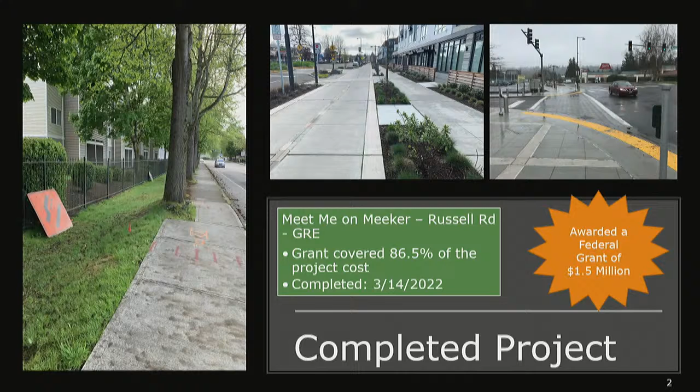So as you can see, we improved that area between those two areas there. We got a grant for $1.5 million for that. And that covered about 86.5% of that total project. And we just got the lights put in early this year to complete that project. Another big project we did last year was 212th Street between 72nd and 84th. And the grant covered about 86.5% of that as well. And that was a $2.1 million grant. So grants pay for a lot of work around here.

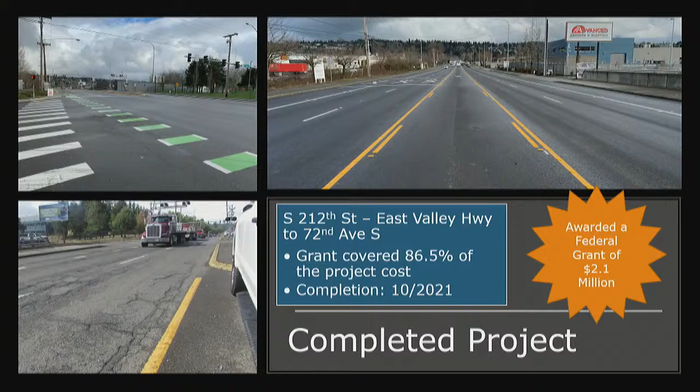So another opportunity we had was Lake Fenwick Road, a chip seal project. This is about 1/3 the cost of an overlay, and we were able to double chip this. We put a lot of oil down, gravel it, then oil it again and gravel it again, and that creates a surface that extends the life of the pavement at least another 7 years. So total project cost on that was $160,000. So compared to the 212th Street, you can see the big difference in that.

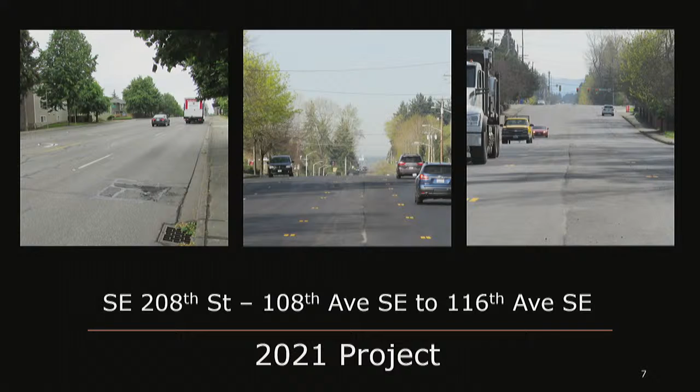84th Avenue South, we did some patchwork there. We didn't have quite enough money to do a full overlay in there. We're still waiting for additional funding for that, so we've completed a lot of patchworks in there. I know our crews spent a lot of time filling potholes in there, so this was a real blessing over this last winter for us. 208th Street, didn't quite have enough time last year to do it, but as you know now, it's been already paved up there, and that's complete. Outside of some lines, I think, is what's left up there.

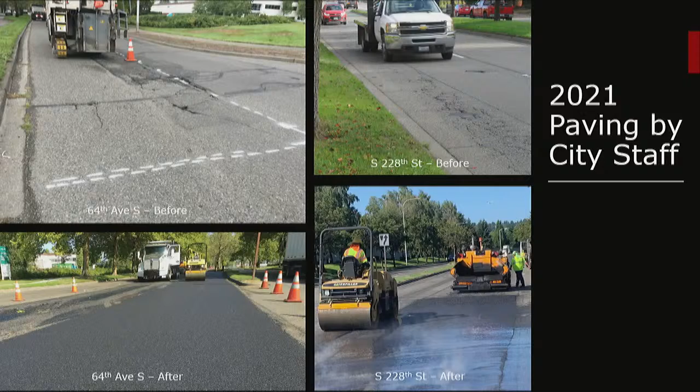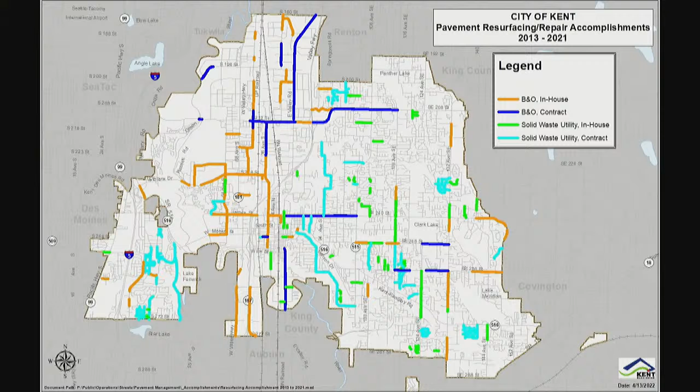So, some of our paving by city staff, I'm going to run through these real quick. We did some on 64th Avenue, 228th Street, 72nd Avenue, 124th was a big one for us up there. As you can see, this is a map from 2013 to 2021 of all the work that we've done. It's been broken out by funding source as well as in-house and contract work. So if you get a chance to look at this later, please do so. Our big project this coming year is going to be South 212th Street.

It's going to be from the Green River to the West City limits there, or Orillia Road. The total length is about a mile. The estimated cost is about $3 million. We've got $1.5 million in a grant for that, so it's covering literally half of that project. It'll be paid for by grants.

This is our 2022 work plan. You can see that we've shotgunned it between the in-house and contract. It's mainly on the East Hill. It's got a lot of work up there. We got some valley work and a couple of spots on the West Hill as well.

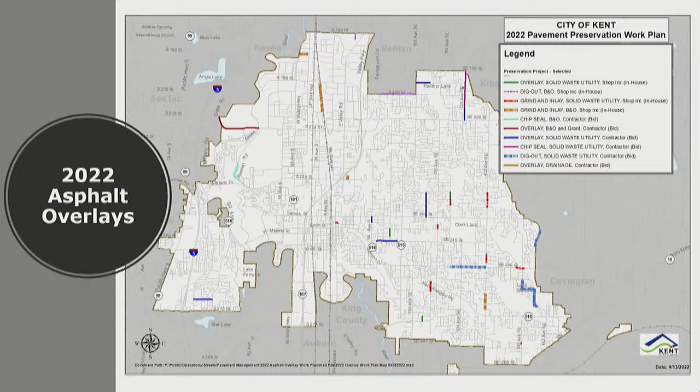So some of the work we're going to do in-house is on 200th Street. That's just west of the Benson there, 108th. And we're going to do some dig-out patching, and hopefully next year we'll get a chip seal on this road as well to complete the project.

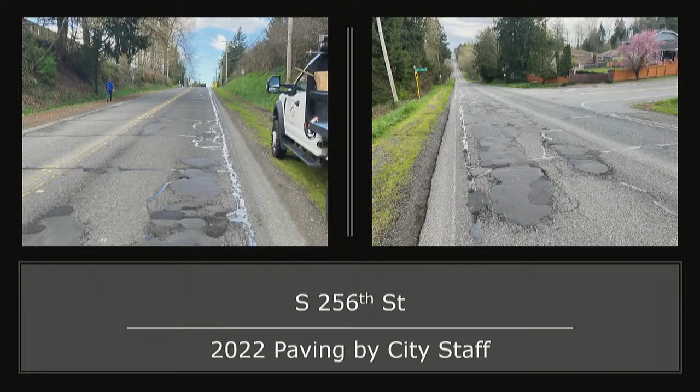256th Street, as a few of you know, this is a pretty rough ride. It took quite a beating this past winter. This year we're going to be grinding out that lane and repaving it so it'll be smooth again. And hopefully we won't get any more potholes further on from that.

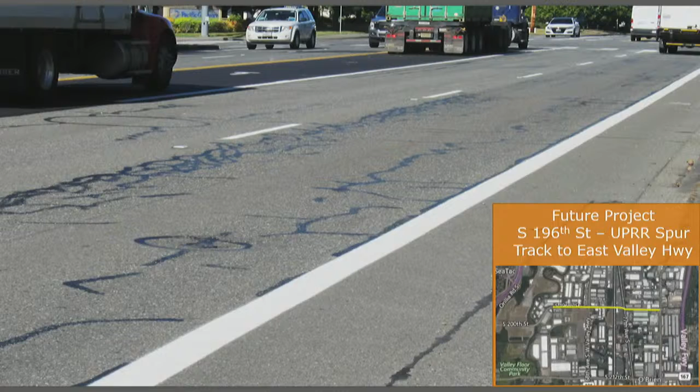So some of the future projects we have are some overlays on 196. That's from the UP Spur Track on the west all the way to East Valley Highway, leaving out the bridge, of course. That's all concrete there.

277th is on our list as well. This road is approaching almost 20 years now. And right now it's a good candidate for a chip seal. So again, we're looking at cost-reducing ways to gain life out of our roadways.

This is Central Avenue. Others call it 84th Avenue. It's between 167 and James Street. Looking for that to be added soon.

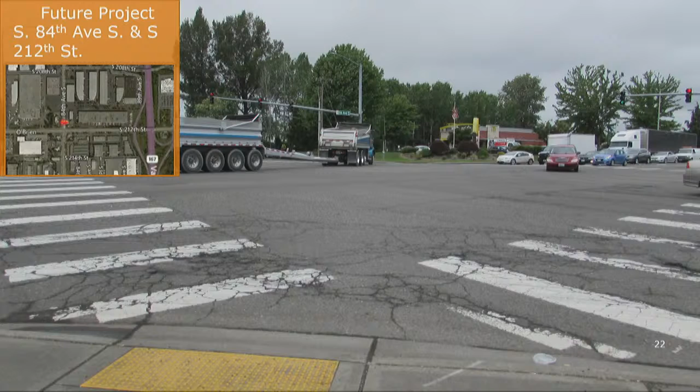212th and 84th Avenue. This is one of the largest intersections we have in the city. It's in pretty bad shape. We're going to try to include this with our overlay on 84th from 196 through this intersection. But right now we're just waiting on funds to be identified for this project. In the meantime, we'll probably be doing some patchwork in the crosswalk areas where there's pedestrian access.

So let's get to the classifications of roads. Principal arterial streets have life cycles of approximately 12 to 15 years. In some cases they go a little longer. You can see here 212th Street and Pac Highway. Those are both considered principal arterials.

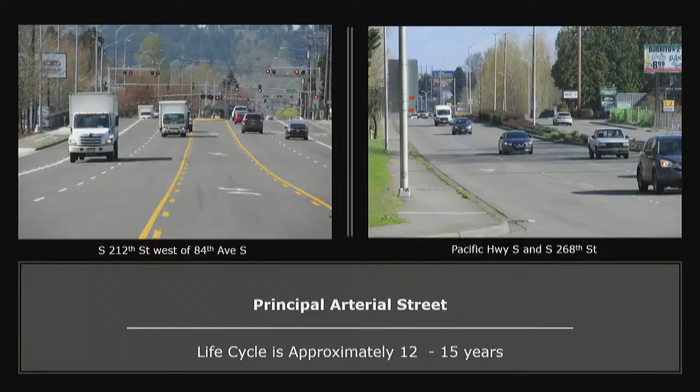Minor arterial streets, the approximate life cycle of those is 15 years in length. Again, some of them go a little longer than they should. You can see the streets: 132nd, Military Road, Reith Road, and West Meeker Street.

Residential collectors go for about 15 to 20 years of a lifespan, and those are roads like 124th, you can see here at 264th, and also up above there at 202nd and 124th. And then we have residential streets. Life cycle is minimum, in my case, 25 years. Some of them we've overlaid and they've been in there for like 40 years. So it just depends on the amount of traffic that's on them. You can see we have one here in Randall Park on the West Hill and a newly paved one up there in Seven Oaks area.

So pavement condition index, that's how we rate our roads. That's most commonly known as a PCI. And that's a rating that goes from 0, which is like unconfined gravel, to 100%, which is newly overlaid. This is on 64th Avenue, and this is what we would call excellent, in the excellent category, because it's newly paved, all the markings are intact, and it's not even discolored.

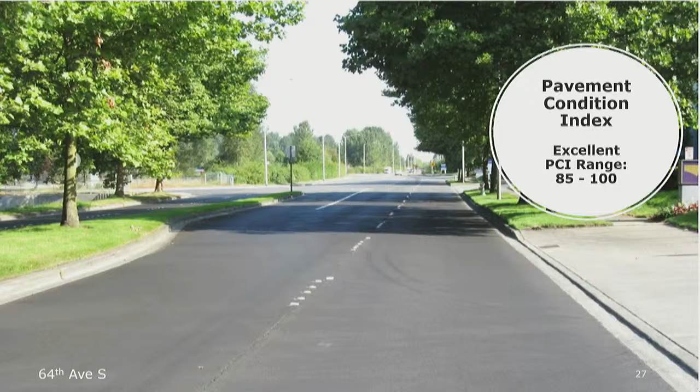So the next one is the same road, 64th Avenue, but down towards the school and the postal distribution plant. So that's the next range. 70 to 84 is good. And here you can tell we're starting to get a crack in here. That's ready for a crack sealing job, but the lines are all intact, the legends are all intact. It's in fairly good shape.

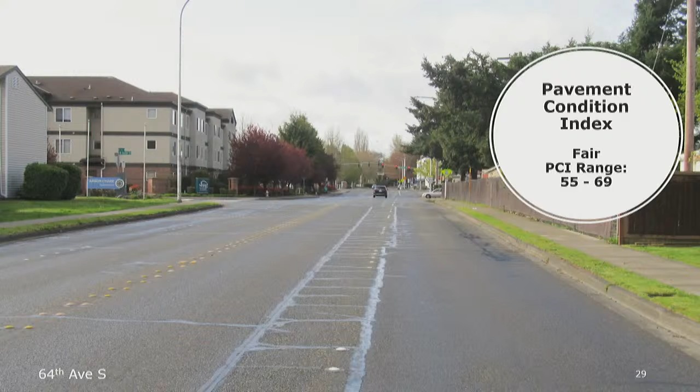And this is 64th again, at West Smith. Now this one we're getting into more cracks. You can start seeing utility cuts coming through the overlay. You can see transverse cracks, which go side to side of the road, and we got a little bit of alligator cracking on the side. This is a fair range, 55 to 69. All three of those areas, these roads are in fairly decent shape to drive on. Yeah, they need some work. We may have a pothole or two here and there.

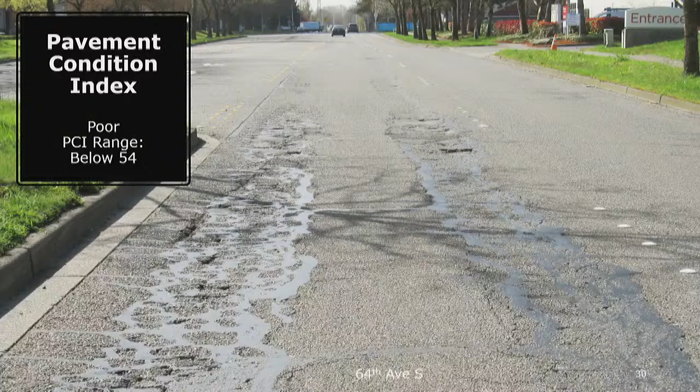This next one is the last one. This is on 64th as well, just south of 212th. This is considered below 54. I would even consider it probably in the 30s. This is where you'll actually have to go and dig out the whole area there and rehab that street, where it's beyond just an overlay.

So if you want to put a graph on all these numbers I just gave you, 28% of our roads are in poor shape. But remember when I said group those three together, we're about 72% of roads that are really in good shape to drive on. Basically, it's in the good, it's in the fair where we need to just start doing overlays and things like that. So really, that's kind of like 50-50, I would think, when you bucket that. Yes. Maybe. Yep, absolutely.

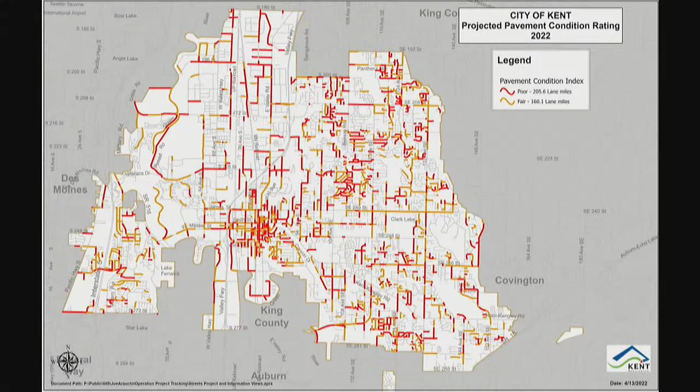So here on this map I showed you, we knocked off the good and the excellent just to show you the fair and the poor. The poor roads are all in red and the fair roads are in orange. And you can see that sooner or later those orange roads are going to start going into the red. Maybe not today, maybe not tomorrow, maybe not even next year, but soon enough. So that's why we rate our roads as often as we can so we can stay on top of that.

So potholes. Some of the causes are excessive moisture in the subbase or subgrade, and insufficient pavement thickness. Some of our roads are only 2 inches, and some of the annexed areas we have are less than 2 inches. So we fill a pothole, it's like that deep before you get gravel. Freeze thaw causes potholes, and constant traffic loading.

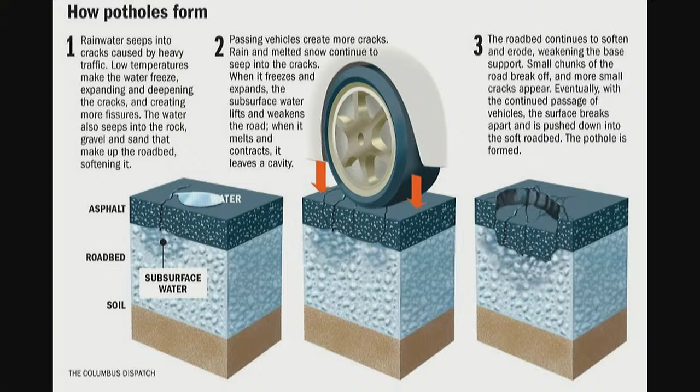So how do potholes form? I know most of you have seen this before, but it's really a good illustration. In a good to excellent road, the drainage runs off the road into the gutters down the system. When you start getting into the fair, you start getting cracks. Water finds those cracks as the easiest way through. They end up going into the subbase and start to soften it, and more traffic pounding creates more cracks, and eventually you're going to have a pothole. And if you have a pothole this big during a rainstorm, it can grow to 2 to 3 feet in a matter of a couple hours. So that's how drastic some of these can get.

So this is a little different map than the last map you all saw. The last one had lines and greens and yellows on it. This one here is when they go out and fill a pothole, they're able to mark it with our new system now and just mark that road exactly where they'll drop a pin. And that's what this map is. So yellow is one time, all the way up to a red or a dark orange that's up to 30 potholes. So you can pretty much see 132nd is where we got most of the problems, and 256th.

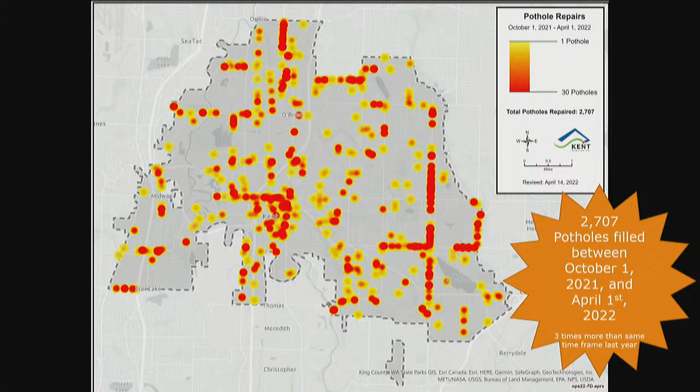So with that, we filled over 2,700 potholes from October 1st to April 1st of this year. And in comparison, from October 1st of 2020 to April 1st of 2021, we only filled 900. So you can see this is 3 times the amount of potholes that we got over the last year.

So, winter weather road damages. It's not only the freeze and thaw, it's water over the roadway. Now this is 148th, right down there by 256. It's constantly underwater because of the low elevation of the road and the high water table. So that is saturated base all the time. So we want to keep the vehicles off of that as long as possible, otherwise it starts destroying the road

as we go. Is 148, once you cross Soos Creek Bridge and then you make that left for 148, is that still Kent? Yes, down there. The whole road is Kent all the way, even the loop back to 240th. Oh, really? Okay. So we close that road quite frequently, right?

So here's the big one over here on 248. This road was in the lower end of the fair range, had some cracks, alligator cracking, and it was ready to go into the poor section. But it didn't make it through this winter because, first of all, we had a lot of rain, then we had a big snowstorm, and then we had freeze.

It froze long enough where it froze under the surface and froze all that moisture under there. And when it thawed out, all the vehicles started punching it. We call this in the industry a frost boil. In essence, all the mud and stuff boils up out of the pavement. We had emergency repairs on that, and it took care of it.

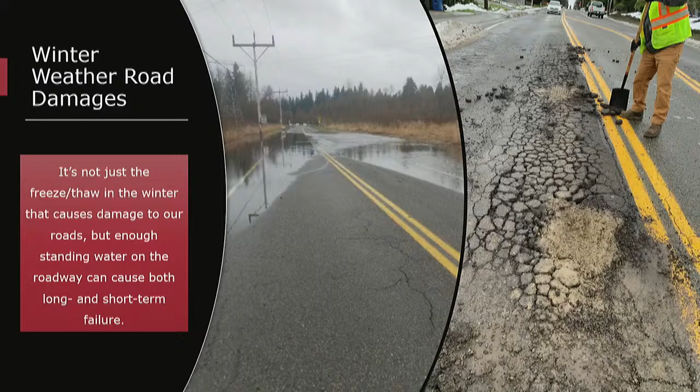It's fine now. So a little bit about the concrete roads. Not going to labor this too long. In the past, we've identified numerous industrial roads in the valley where, if we were to rehab the roads, we'd consider concrete. However, concrete costs 35% more initially to install. However, you get up to a 50-year life cycle out of concrete.

So anytime we consider doing any kind of rehab, we have to consider, is it feasible to do concrete at this point? If there's funding available, we'll do concrete. The intersection at, I think, 212th and 84th, there's going to be concrete there? Well, we're still in debate about that. It's a lot of money, that'd be virtually a whole year's budget just to do that intersection. So we're trying to combine that with the rest of 84th Avenue all the way to

196. I'm sorry. So the transportation bill that was just passed, can't we get some of that money? Is it peanut butter spread out, or how did that work with helping us with some of this work? Yeah, we were given money in the transportation bill, but it was for specific projects. We got money for the 224th project going up the hill from 94th to 108th along 216th and 218th, money for Meeker, and money for the quiet zone, but we didn't get money for maintenance.

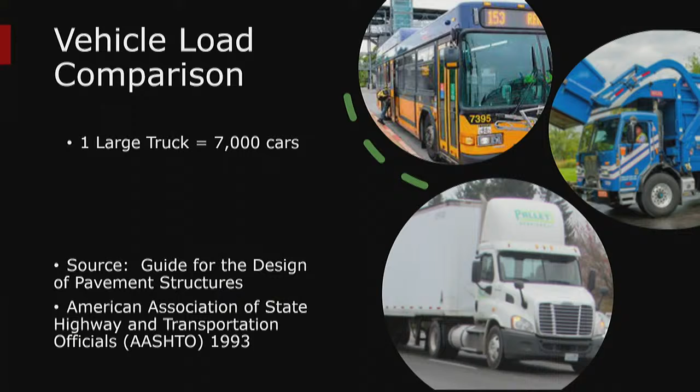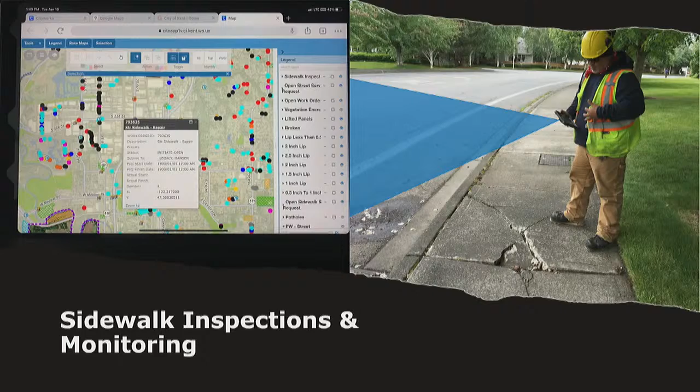So moving on to the non-motorized portion of it, we're getting close here. We inspect our sidewalks every 12 to 16 months, and we have a cycle of about 300 miles of sidewalks that we cover. And that little tablet he's got, he's able to identify a spot right out there in the field, put a pin similar to the potholes, but on this one he can actually tell you exactly what it is, take a picture of it, drop a pin, and then off to the next one he goes. Very, very little handwriting. He just takes it back into the shop at the end of the day, downloads it into a computer, and it puts it into our inventory.

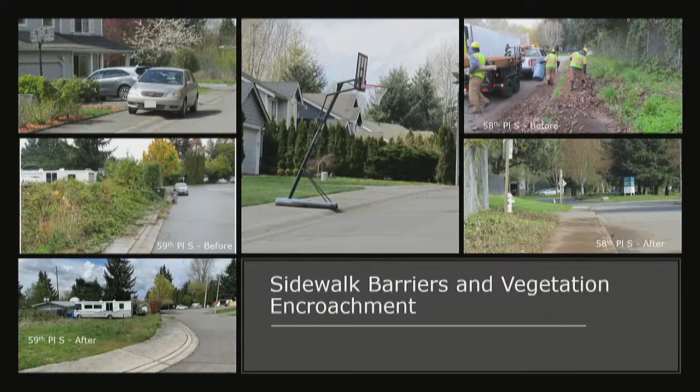So the downtown core needs approximately 5 miles of sidewalk upgrades, and that's not just broken and lifted sidewalks, that's ADA non-compliant. That's driveways that are at the wrong slopes. I think Rob's going to talk a little more about that, so I won't belabor that too much. But I remember 35 years ago, I was in here taking panels out because they were lifted by those sweet gum trees that were out there. Well, they replaced the trees, and now we have tree boxes and stuff that are getting uneven. So we'll be back at that again. So 35 years, and we're still not out of the core.

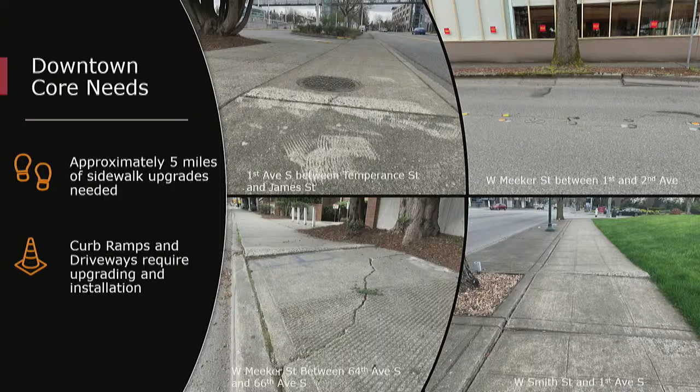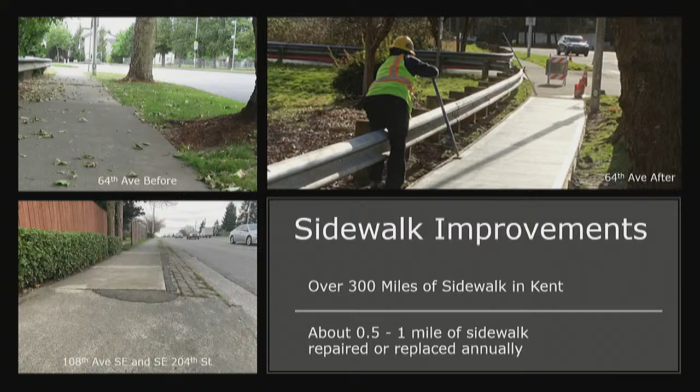But, sidewalk improvements. Like I said earlier, we have over 300 miles of sidewalk in Kent. And our crews repair or replace about a half mile to a mile annually. Here's one of those on the far left. You can see we shimmed that sidewalk. It was just too big to grind. But the one above that is 64th Avenue. It was all broken up and lifted by the tree roots. We took it out and we put in a new sidewalk there.

So filling sidewalk gaps and adding sidewalks. Well, over the past several years, we've added sidewalks, primarily over on Reith Road on the west side. It was just a trail going up that side. We connected it all the way from Lake Fenwick Road up to 253rd.

In the last couple of years, we were connecting a sidewalk on 260th/259th Place from 27th up to the apartments there just before I-5. That part was the part that we finished first. And then the next two phases was on the east side of I-5 to Military Road. We completed that section this last December.

And it's complete with lighting and conduits, and it just makes it a little bit brighter in there during the nighttime. And Sound Transit still has a section under I-5 that they need to complete. Hopefully that'll be done, I don't know, the end of this year, probably into next year. But by that time, everything will be a continuous strand all the way from Pac Highway to Military Road.

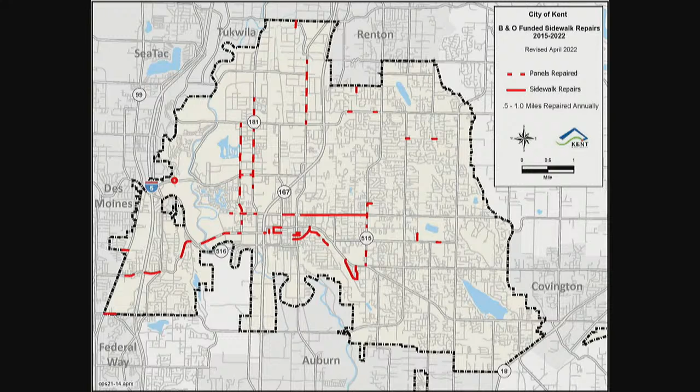And to add to all this, we have over 175 miles of missing sidewalk at a cost, before COVID, of 127 million. So who knows what it is now with the inflation of the costs and stuff. 127 million is a lot of money. So obviously we can't fill everything. Just to give you an idea, over the last 8 years, our crews have rehabbed and replaced and put in new sidewalks in all these areas you see on the map. They've done a great job.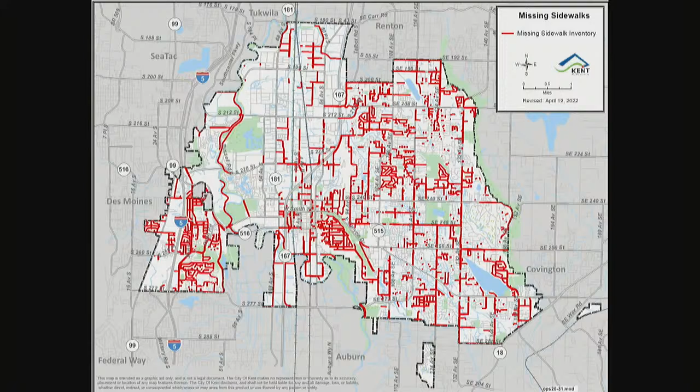Quick question from the mayor, please. Yes. Bill, question for you on the concrete. Are we seeing any of the impacts of the hangover from the concrete strike? I know Sound Transit was there. Significant delays, talking 4 or 5 months to get everything back up and running. And I know that has to do a lot with the other trades that they have on site. But I'm wondering, just on the amount of concrete that the region is behind, is that going to impact our ability to do this work over the summer?

Actually, the two groups that we used weren't part of the strike, per se. We were able to secure a weekly, regularly scheduled pour day. Oh, good. Which helped to nail down a carrier for our concrete. I don't know how he did it, but he did it. And we were able to get concrete every Wednesday to be able to pour more sidewalk and repair more sidewalks. There was an increase in cost for fuel that they attached to each load. But basically, we really didn't see too much of an interruption. On the fuel increase side, are we seeing that in our asphalt bids too? Yes, we are. Okay. Thank you.

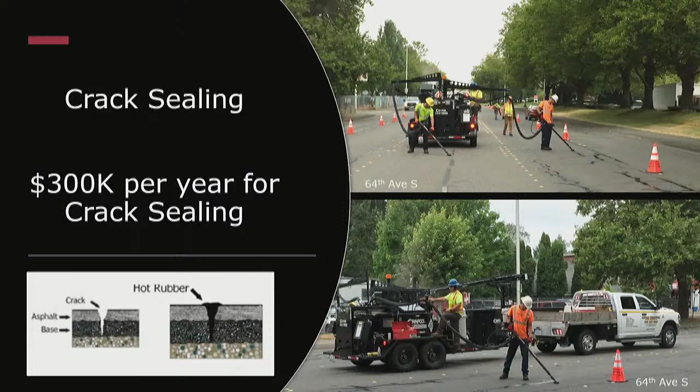Okay, moving on to some of our capital projects quickly here. With crack sealing, we talked about, on the fair roads, we want to get those cracks all sealed up. That's $300,000 a year. And these are the areas that we're doing, primarily in the valley. We got some West Hill areas that we're taking care of in the residential area. Line striping and raised pavement markings. Most of this work is done at night because of the traffic and less tracking of the paint, and a little bit safer for our RPM guys when they're laying out those markings. I don't know if you can see it in that picture, but that guy's hanging out underneath the truck, putting those buttons down on the road. A total annual cost of that's about $350,000.

And here's the map that we use annually to bid our work on. You can see it's all green. Those are done once, and then there's a touch-up again by the end of summer. You can see the dark lines there. That's where all our work is happening this year. So they know to not paint those until the end of the season, so we're not ripping up fresh paint with our new asphalt.

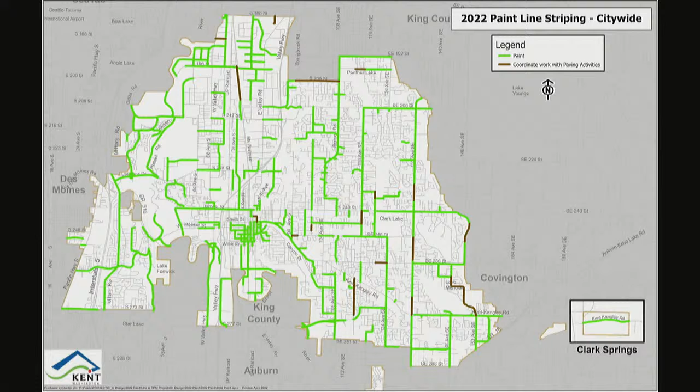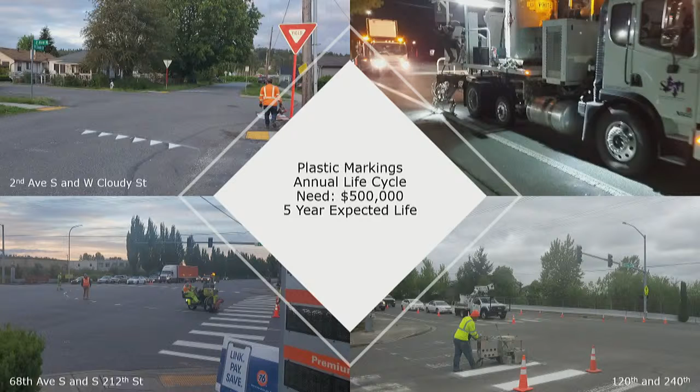So, Councilmember Thomas. Yes, thank you, Mr. Chair. Bill, when an accident takes place and a guardrail's wiped out, does the city go after the insurance company too to help pay for that?

Yes, primarily we contact their insurance company, but a good portion of them do not have insurance at that point. And then we just have to send them the bill and then go through the process at that point. And sometimes we're fortunate to get payments, and other times we're not. So, but this is a good one that we actually got an insurance company.

Okay, thank you. Yeah. Signs and markings, pavement markings, signs tend to wear out, okay? We have about 20,000 signs in our inventory, maybe a little more, don't quite know yet. They have a lifespan of about 12 years depending on which way they're facing, right? If it's in the sun, they're gonna fade a lot sooner.

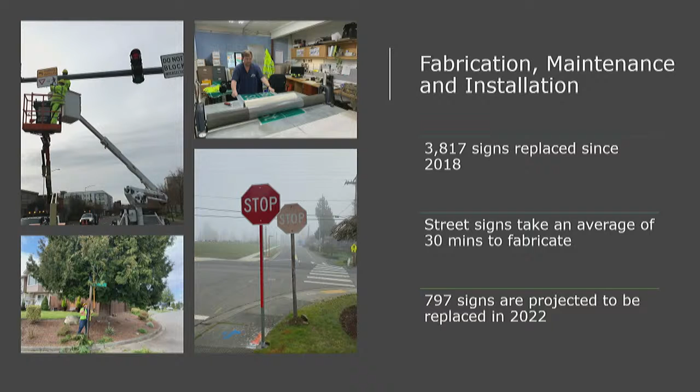And our overhead signs. I don't know if you've noticed the new overhead signs or not. They're built for people like me that need to see better, especially at night. They're huge. We're on our last leg of that. So we've already completed 4, maybe now 5 intersections as of this year. We're concentrating the rest on Kent-Kangley Road, starting at 104th all the way out to 152nd. So those are the last bits of intersections that we have to do.

Bridges. We have 21 bridges in our inventory, and our annual maintenance cost is about $150,000. We do some minor repairs in-house, but the majority of that money goes towards our inspections. Okay, we have to have our bridges inspected at least every 24 to 48 months, depending on what type of bridge it is.

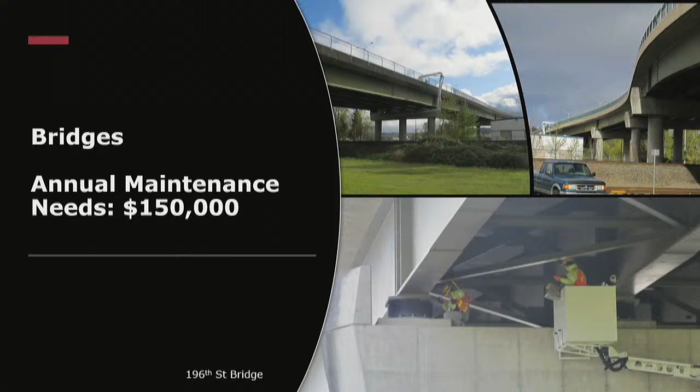The most expensive part here is this truck that they use. It's an under-bridge inspection truck, a UBIT, okay? It's an articulating boom that actually goes out, over, and underneath the bridge, and as you can see, it gets them under there so they can inspect the superstructure of the bridge. This is the 196th Street Bridge.

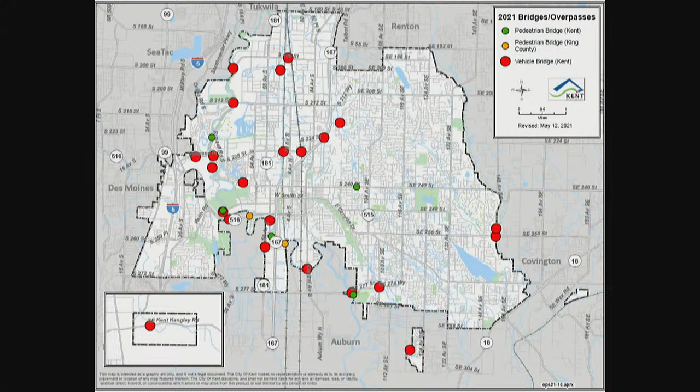So you've seen this map before. It shows you all the bridges we have. We have a couple of co-owned bridges, one with the county and one with Tukwila.

Meeker Street Bridge, this is a big one I want to talk about really shortly, okay? Meeker Street Bridge, the last major work we did on that was in 1994, and it got a paint job then, okay? We have an opportunity to get a paint job and a deck repair on this. We applied for a few grants. We received 2 of them, a $3 million grant for painting and almost $1.5 million for deck repairs.

Okay, that's $4.5 million, and it's very expensive work because obviously they have to encapsulate the bridge for any kind of work they do, because they don't want any of it falling into the rivers, into the creeks, into the sensitive areas. So to top this all off, there's no matching grant money to this. This is all money if we can get it spent by 2025. Okay, so that's really an excellent catch our guys took on that one.

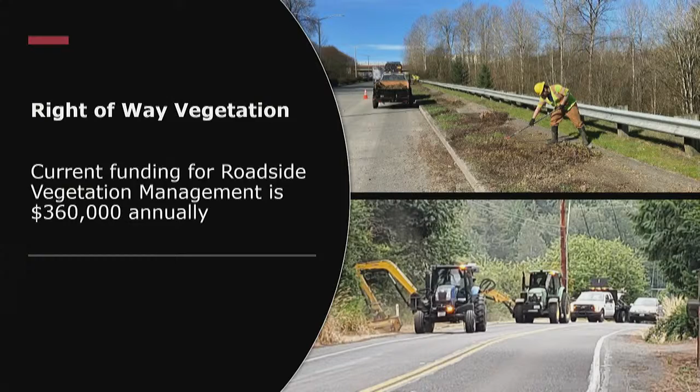So great. So moving into right-of-way vegetation. We spend annually $360,000. This takes care of all the side mowing; the sidearm mowing does the brunt of the work. But again, our 3-man crew that's on the ground, they take care of a lot of stuff here. So here's a good example. The upper left-hand corner, we got a complete street, basically. We got planted street trees, we got mow strips, we got a planted traffic island, and those guys do it all, okay? They do the James Street planter strips there, as well as the grass behind the sidewalk, highway islands, and we got this little triangle island at the Y there at 256. They're starting to get all these islands looking really good.

So this is what the street vegetation group does. It's primarily 3 people. This doesn't count the sidearm mowers. They're out on all the unimproved roads. These guys are on mostly improved areas. They do expand their crew to 5 to 7 people if needed, if there's a rush job to do, but primarily 3 people. And this is the work they do several times a year. So that's a lot of work these guys do.

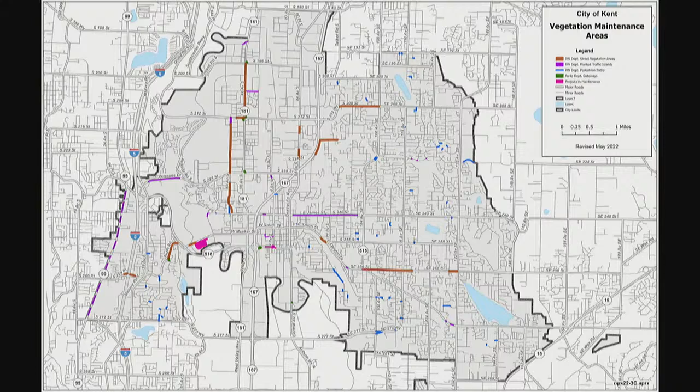And finally, the street trees, okay? We spend $375,000, that's what's in our budget annually, and that's for temporary help, that's for pruning contracts, to get the height of the trees up above the sidewalks as well as in the streets, and to actually get them looking good. Occasionally, we'll be removing trees when they're being ornery to our sidewalks, or they've outlived their usefulness and they're starting to decay and wilt. So we'll remove those as well.

We do have a plan to replace trees that have been knocked out. It's primarily over on Reith Road. I know we're going to look at possibly putting in a few trees in that area as well, but basically I think that's all I got. So, just a few things. All right, just a few things.

Yeah, I think you said it seemed like this year the roads are a lot worse. Is that because the weather the last 7 or 8 years has not quite been as bad, or is it just coincidence? It's a combination. It's all those poor roads and the lower fair roads where they're just about going to poor. If you get the not so perfect weather, you get the rain, the freeze, the thaw, they just start delaminating and flying all over the place. Now there's a lot of work that needs to be done. So you can't start it until the weather gets warm, I'm guessing, for repairing the road?

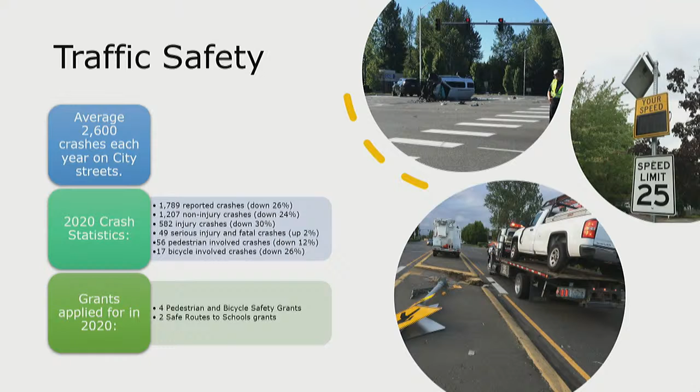Our serious and fatal injury crashes were up 2%, but that number, in the 50-ish range, one number can make a big change in the percent, but again, keep our fingers crossed that those are down. In 2020, we're also down on the pedestrian crashes and the bicycle-involved crashes. We've already talked about the 2020 grants, so we'll keep going.

Local road safety plan. You heard about this a couple months ago from Erik Preston, our city traffic engineer. The local road safety plan is something that we need to put together now to qualify for safety grants from PSRC and from Washington State Department of Transportation. Some of the grants we can't even apply for without the plan, and some of them are a points type analysis where we get extra points for having the plan or don't get those points if we don't have it.

So the local road safety plan is a data-based analysis. The federal government, along with a lot of different states and a lot of different experts, spent a long time coming up with empirical analysis methods for safety. Prior to this, it was just traffic engineers, just with experience: this is happening, we think we should do this. So we now have an empirical, scientific method for doing this.

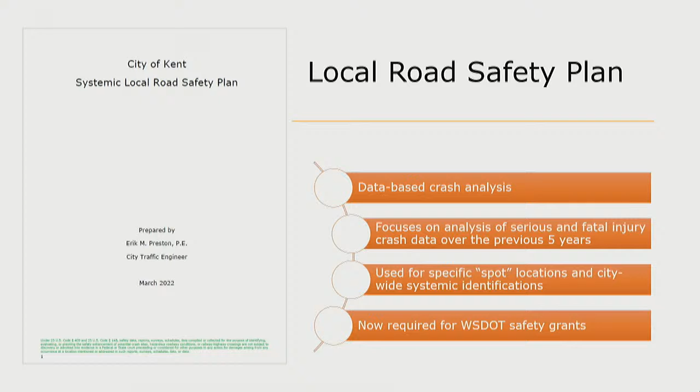And what it does is it looks at the fatal and serious injury crashes over the previous 5 years and determines the hot spots. And so when we do this, done by our team, we come up with spot locations, which are typically intersections or a high crash location, as well as systemic citywide locations. And again, we update this about every 2 years to coincide with the grant schedules, which is the even years.

And we'll move on to our residential traffic calming program. This was adopted in 2020 with an update earlier this year. Residential traffic calming program focuses on neighborhood livability. It's not specifically a safety program. Again, we have our local road safety plan that focuses specifically on that. This is a neighborhood livability program. It does focus on speeds. It's a points-based system. Speeds do provide the highest number of points.

But it also considers things like, are there sidewalks on both sides of the street? Is it near a transit center or a school? We consider the traffic volumes. We also consider the crash history. 2021, for last calendar year, we received 33 requests. So far in 2022, we've already received 6. And we typically see those numbers go up when the sun starts coming out. So it could be as early as this month or next month. Those numbers typically go up in the summertime when people start getting outside.

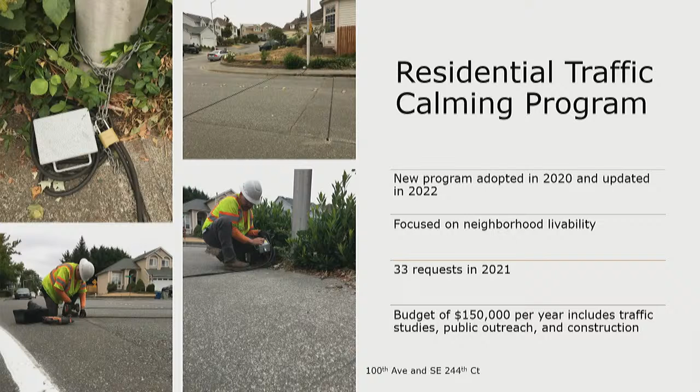And just a couple pictures of traffic calming. Upper left corner, this is 98th Avenue and 240th. This is over by East Hill Elementary School. These are speed cushions. They're kind of like speed bumps, but they've got the grooves in the middle. This is something we've worked out with the fire department. Having a speed bump or a speed hump, which is an elongated speed bump, slows down their response times, especially with the fire trucks. Those are big, heavy vehicles.

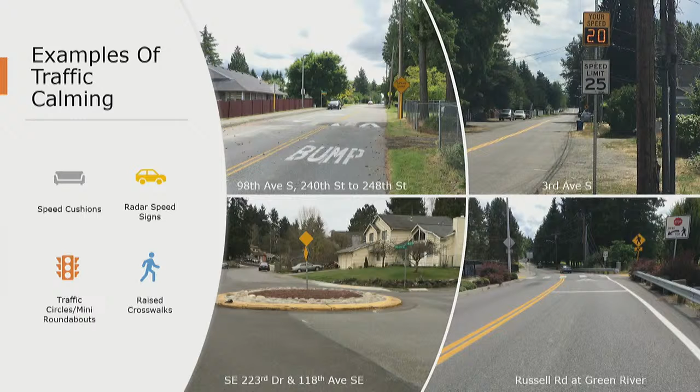Then 2 more quick. Upper right, we're showing the radar speed signs, and lower right, we're showing raised crosswalks. So this is on Russell Road, right next to the shops at the Green River, but we're doing raised crosswalks also in the neighborhoods. And we'd like to do these near parks and on school walk routes and things like that. Enhanced crosswalks. I would consider this not only an enhancement for pedestrians, but also a traffic safety... These are for locations that are mid-block crosswalks or unsignalized locations.

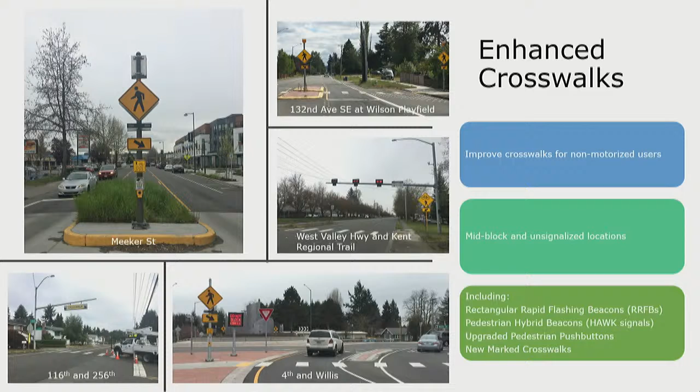Hey, real quick, that top right, the one on 132nd, looks like the centerpiece is no longer there. I think somebody hit it. Took it out. Yes, unfortunately true. So we've ordered the parts. We're just waiting for those to come in. Yeah.

Moving on to Americans with Disabilities Act, or ADA. ADA is something that's been in place since 1990. It's been a requirement for cities to have an ADA transition plan and inventory since 1992. So we're coming up on about 30 years there.

So multiple steps. The first thing we need to do is inventory our existing system. And one of the things about ADA, Bill touched on, showed the maps of our missing sidewalks and the sidewalks that they are working on. But ADA is focused on the existing system. So it doesn't look at what's missing or what needs to be included from our perspective to build out our full sidewalk system. It only looks at the things that are there. And it is focused on improving those existing facilities to meet the ADA requirements.

So the first thing we do is we need to do an inventory, and that includes all the non-motorized facilities. So that's the curb ramps, sidewalks, driveways, our traffic signal system, and the bus stops. And once we have our inventory in place, then we go through a public process to prioritize those improvements.

And just the pictures here, this is First and Titus, just right over here at Titus Railroad Park. The before picture is a curb ramp that doesn't actually look too bad, but it is non-compliant in several issues. And then if you've driven by there lately, the Parks Department's redoing the park, and I believe they just poured the curb ramp this week, so that should be open pretty soon.

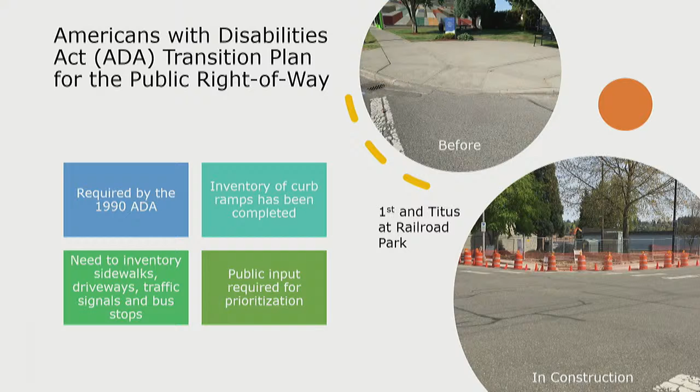By federal law, it is actually required to bring that crossing up to ADA standards. So that project had to build the curb ramps in those corners. And so great ADA improvement. We went from somewhere with no curb ramps to a fully compliant corner.

So driveways, I suppose I should also mention, as part of our inventory process, we have already inventoried all of the existing curb ramps in the city of Kent. That was completed about 2 years ago, so we have an inventory of those. Currently working on the ADA inventory for the driveways in Kent. Another big task. There are many more driveways actually than there are curb ramps in the city.

Showing a couple pictures here. These are just pictures I took walking around downtown a couple days ago. Some of these curb ramps don't look too bad, but none of these are actually compliant. And the big thing that gets us usually is the cross slope.

So as you're walking down the sidewalk, the difference in elevation from your right side to your left side, that can only be 2%, which to put that in terms of feet, if you had a sidewalk that was 50 feet wide, it can only be 1 foot difference from one side to the other. So it is a very shallow sidewalk. And so these driveways that are part of the sidewalk system are not actually ADA compliant.

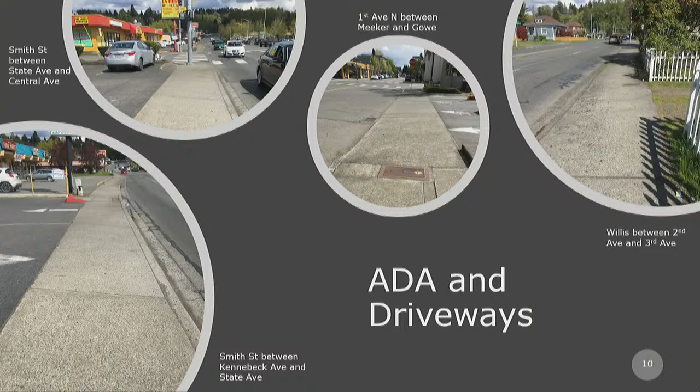Again, we're going through the inventory process. Once that's done, we'll then go through the public outreach process, and then we'll start focusing on those areas that the public thinks are most important. Sidewalks. Following the driveways, we'll have to inventory all the sidewalks. And again, Bill had a nice map showing all the missing sidewalks and damaged sidewalks. But when it comes to ADA, again, ADA is very picky, very specific.

Just some pictures here at the upper left corner. Sidewalk clear width needs to be at least 48 inches or 4 feet. So we've got some encroachment issues. Like Bill said, we can usually contact these neighbors and have these things taken care of.

Lower left, some discontinuities. This is, in my neighborhood actually, a well-meaning neighbor, when it froze earlier this year, shoveled the sidewalk, put some ice melt out. Unfortunately, older sidewalk, it refroze, and when it refroze hard, the top layer of the sidewalk popped, spalled.

And so you're only allowed about a half an inch for ADA for a vertical discontinuity or a gap, something like that, which you can see in the two center pictures and those kind of things. When you get those gaps that are more than a half an inch, that's not ADA compliant.

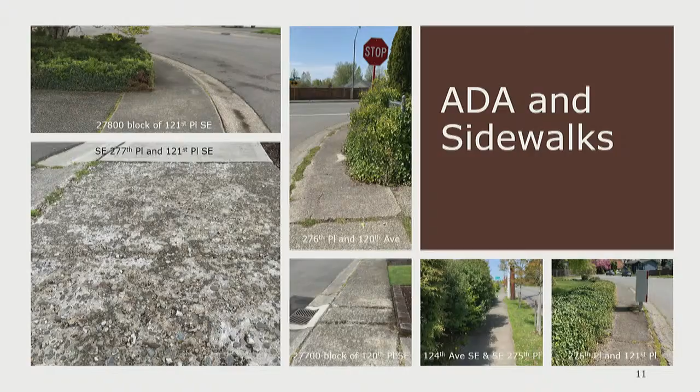I have a question. How do we prioritize when we take a look and we've done the inventory? We know we have all these projects to do. Great question. Do we have a use calculation on sidewalks, or how do we determine?

That's a great question, and that is, once we finish the inventory, that's something we're going to have to think about. But the first piece of that is the public input process, similar to what we did with the Transportation Master Plan, only on an actually larger scale. We will hold a bunch of public meetings, workshops, and things like that with the council, the public, business owners, a bunch of different people, because we need to get all of that input, and that will then tell us what our priorities are.

Do we want to focus near elementary schools? Do we want to focus in the downtown core where we expect more people? Do we focus on transit routes so people can get to the bus stops? And so from that, we will probably come up with some kind of a large prioritization process and then go from there. We'll look for the public input, but the things that we'll suggest people consider are the number of pedestrians, proximity to senior facilities. So those type of things.

Thank you. Hey, Councilman, by the way, this light's not working, so just go ahead and talk. I can't see nothing, so just speak up.

And then just to finish this slide off, a couple of the things that we need to be looking at. Lower center, again, vegetation encroachment, those are things that we can easily take care of. But something that most of us probably don't think about related to ADA is the lower right, the mailboxes. Having a mailbox blocking part of the sidewalk, if we don't have at least 4 feet around that mailbox, that's not ADA compliant.

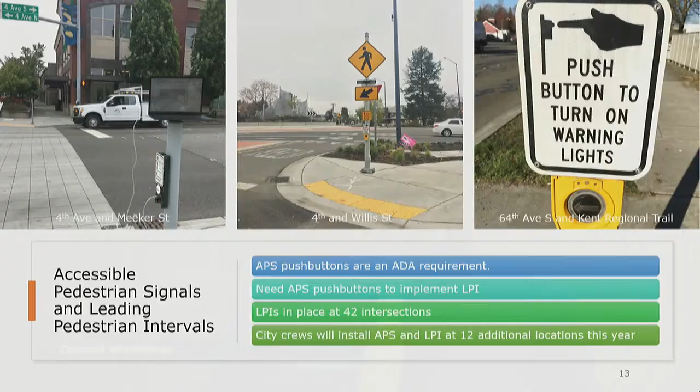I'm going to say probably not. I think our oldest installations are coming up on 3 years old. So we could look at them to draw some general conclusions, but thankfully the number of pedestrian incidents in Kent is fairly low. So over time, I think we would see a downward trend, but I'm not sure that in just a couple of years we're going to see something noticeable. And when we're talking 20, 30 type crashes a year, just the randomness of these things could skew the numbers significantly. But I think over time, and it is a proven technology, something that I am personally very excited about.

I could imagine that, because hopefully the drivers, it's going to catch their eye. My son's friend was hit that way. Yes. But I was hoping that we could see the numbers and actually see a considerable decrease. It's something we'll take a look at, and so when we do our next local road safety plan in 2024, the oldest ones will be in for about 5 years, and so that's something we can take a look at and see if we're seeing some kind of a trend there.

The technology and the implementation is proven nationwide, so they're in other locations, and many studies went into this before this became common, so this is a proven technology. And I did want to mention that we are using B&O funds from the crosswalk safety account to fund these. So we're spending about $100,000 a year on crosswalk safety, primarily on getting these done at the traffic signals.

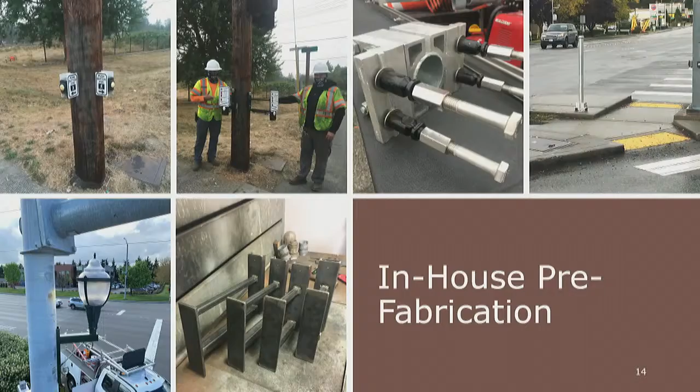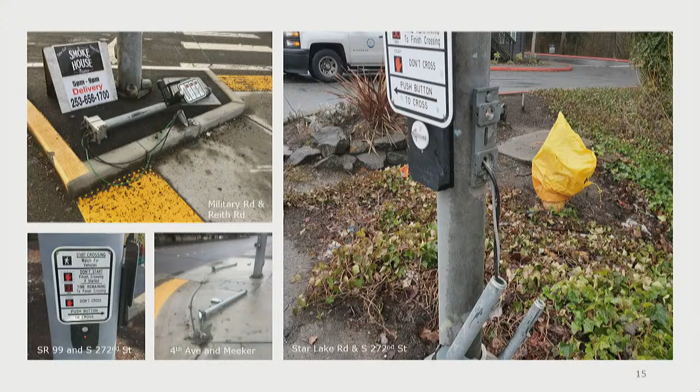However, putting in those ADA push buttons, a lot of times it puts those closer to traffic, and so occasionally they get hit. So in addition to putting in new ones, we're also replacing some of the ones that are kind of more out there in the traffic. But again, meeting ADA and getting those things to make our traffic signal system more accessible for people. All right, now let's move on to traffic signals and streetlights.

Just a quick overview of our traffic signal system. We have 117 traffic signals. We have 12 flashing beacons. We have 44 school zone flashers, so all those elementary schools, we have 44 flashers in the city. We have 25 radar speed signs, 17 enhanced pedestrian crossings, for a total value of our signal system of around $60 to $70 million. Given the recent inflation over the last couple of years, that's probably 15% low by now.

Just a quick map to give you an idea of where our signal system is. Traffic signals are the yellow dots. The enhanced crosswalks are the red triangles. You can see those primarily along Meeker Street and at the 4th and Willis roundabout, and then some other locations around the city, in front of the YMCA, places like that.

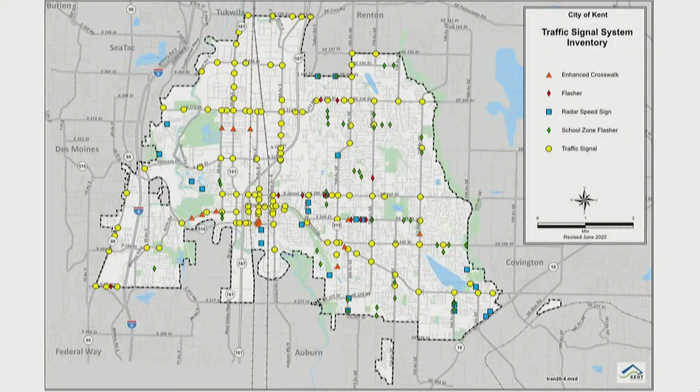Our radar speed signs are the blue boxes. Those are primarily in neighborhoods, with a couple on places; I think there's some on Benson. Two we just added to James last year. The 44 school zone beacons are the green diamonds. And so you can see a pretty extensive system we have.

Traffic signal maintenance and repair. So we spend about $240,000 a year maintaining traffic signals. This doesn't include replacing traffic signal cabinets or traffic signal poles or our uninterruptible power supplies, which we'll talk about later. This is just on parts to maintain the existing traffic signal system.

Auto collisions, we spend about $60,000 a year repairing damage from crashes, as we'll see in a minute. And we have a few of those. Storm damage, we average around $40,000 in repairs the last couple of years. Knock on wood, we've been below that number.

Believe it or not, a lot of times when there's a lightning storm, we get lightning damage. It'll hit a traffic signal, take that one out. If it's connected to a different intersection with the old-fashioned copper wire, sometimes it'll jump intersections and take out 2 or 3 of them at a time. But the overall system is aging, so it does take a little bit more maintenance to keep it going.

A couple things I want to point out: the pictures in the center or on the left side, those are actually bullet holes. So occasionally you have to do some of those repairs. Upper right, you can see the crew doing some signal head replacements, and then the lower right is just a picture of some of the things that we come across.

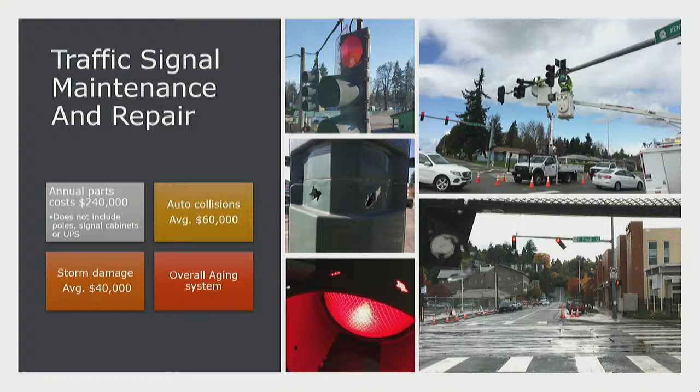Our traffic signal poles. We have about 450 traffic signal poles for those 117 traffic signals. The steel poles have about a 50-year life cycle. They sit on concrete foundations. To replace one of those poles costs in the range of $80,000 to $90,000, and that is something that we need to hire a contractor for because we need somebody with a big crane that can actually take that pole out and put it back in.

I would also like to point out that unlike our streetlight poles, our traffic signal poles are not designed to be breakaway. Those are designed to take a good hit. The thought there is that for a signal pole with the arms on it and the signal heads, if that got hit and knocked over, the risk to the traveling public is greater than if it withstood an impact. On the other hand, streetlights are a single pole. We designed those to be breakaway so that they get knocked over and fall down, and that's lower risk to the public because they're just a single pole.

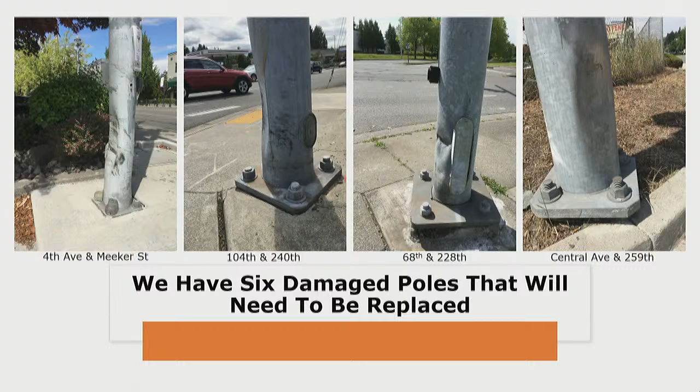68th and 228th, and then Central and 259th. And then there is one other signal pole, 272nd and Star Lake. That will actually be replaced by Sound Transit as part of their traffic mitigation for the Federal Way Link Extension project. So out of the 6 damaged ones, 2 of those poles are going to be replaced by other projects.

Span wire signals. So these are traffic signals that are actually hung by wires between poles at the corners of the intersection. We have 14 of these. These are typically installed to be temporary. These are places where we decided that we need a traffic signal, but we don't quite have the funding to go install the full meal deal of metal poles and metal arms. In today's cost, those are typically $700,000 to $1 million to install one of those, full traffic signal.

So these are much more cost effective. However, again, they are meant to be temporary. We have 6 span wire signals on steel poles and 8 on timber poles. And of course, the steel poles are designed to last much longer than timber poles. And so several of those timber poles that we've got in these span wires are in need of replacement.

So a couple pictures. The top picture is 132nd and 240th near the QFC. That's a timber span wire signal. Those poles are actually in pretty good shape. And then the lower picture is 100 and 240th. That's East Hill Elementary right there in the picture. Those are on steel poles.

Hey, Molly, that's not you at the light, is it? Like your car at the light? Running the light. Stop it. Maybe my car is.

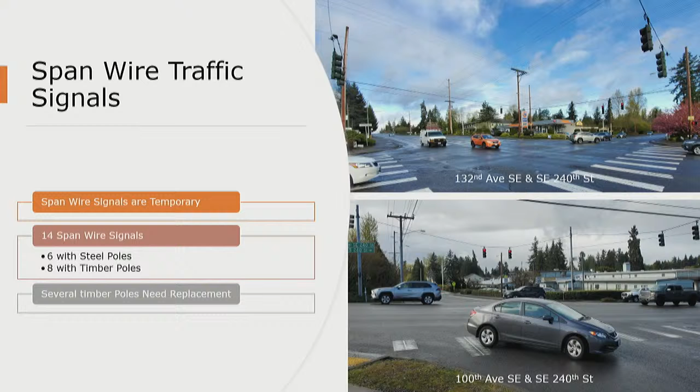So these do still have some issues. Unfortunately, about 2 months ago, we had a truck catch one of the wires and pull it down. But our crew went out there and got it put back up in a couple hours, and everything went back to normal.

So, traffic signal controllers. So again, we have 117 traffic signals. Each one of them has a traffic signal controller inside the box that operates a traffic signal. In the last 3 years, we've replaced 70 of those controllers. Our signal team, city staff, has replaced 39 of those, and another 31 of those were replaced by contract. Our last antique traffic signal controller was replaced late last year. This was actually part of the Kent School District, Kent Laboratory Academy in the old Panther Lake Elementary School there at 108th and 208th. That was our last antique controller.

It was replaced. These controllers have a 20-year life cycle, so we need to replace on average about 6 per year. And then we also get some that are damaged by the auto accidents that we've talked about, and so last year we replaced 2 of those. Along with these, we have the signal cabinet upgrades, and 4 of the cabinets were replaced by signals last year.

And one thing I did want to point out is these life cycle costs and upgrades and the work that our team has done to get these traffic signal controllers replaced over the last several years has actually done a really good job at reducing the number of after-hours callouts. So, find my numbers here. So in 2018, there were 37 after-hours callouts to our signal crew because of our older controllers. Last year, 2021, we were down to 11, so less than a third. So it is paying off.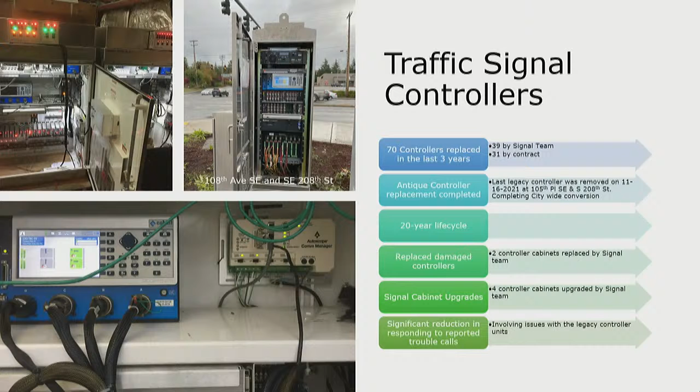Just want to show you a picture of an antique traffic signal controller. We debated on this, but I find this fascinating. The controller on the left is an antique traffic signal controller. Believe it or not, it uses a motor, an actual electric motor, and gears and mechanical switches that move with levers and cams to actuate the traffic signal.

Wow. By contrast, the modern controller on the right side is a very capable high-speed computer. Doesn't run on Windows, so it is very robust and stable, and can do many, many different things. These old ones, you could adjust cams and gears and things like that. You could program it to some degree. These new modern ones, absolutely amazing.

Controller cabinet replacements, traffic signal controller cabinets. So the actual metal boxes that these sit in, they have a 25-year life cycle compared to the 20-year life cycle for the actual computers inside. We've currently replaced 46% of those. City crews have replaced 54 of our controller cabinets in the last 5 years, and we're scheduled to do 5 more this year. So these are life cycle replacement costs. In addition to those, we also end up replacing several traffic signal controller cabinets per year due to crashes.

One picture I did want to highlight, right side in the center, this is 104th and 260th Street. This is right next to the Kentucky Fried Chicken. This was one of the traffic signal control cabinets. It was replaced in 2019, and last year somebody drove into it. So unfortunately, some of the hardware inside was salvageable, but the majority of it had to be replaced. But again, these are on the side of the road, so it does happen.

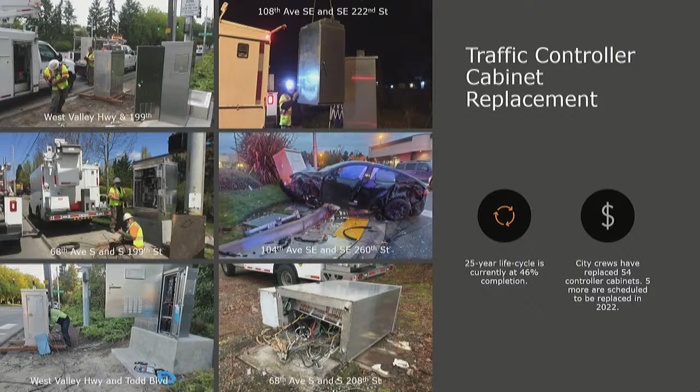Uninterruptible power supplies. These are basically battery backups for our traffic signals. They have what amounts to large car batteries in them, usually about 3 of those. With the traffic signal displays, the lights, all using LED lights now, we can power our traffic signals for about 8 hours on battery power before they go dark, which is a huge improvement from when we used to have the old incandescent style light bulbs that went dark almost immediately.

So we have these installed at 89 of the 117 intersections. We want to do 24 more, and there's a couple that we've decided probably don't need the uninterruptible power supply. These have a 25-year life cycle like the cabinets, and so we'll need to replace on average 4 or 5 per year. But along with those comes batteries. So we have 306 batteries that we have to maintain. And the batteries last similar to a car. They last for about 5 years, so we spend about $15,000 a year now for battery replacements.

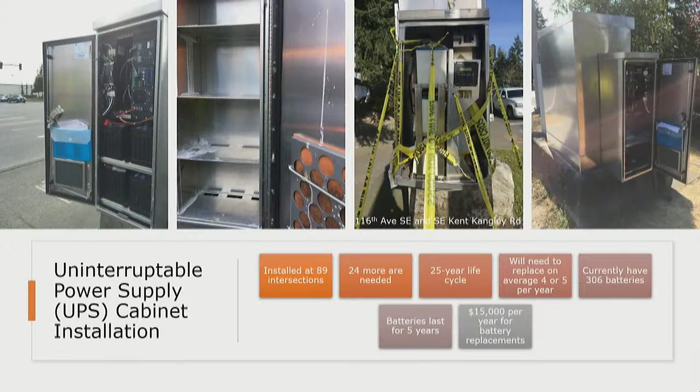But one nice thing about having these with the batteries, some of the storms that we've had in recent years where we've had some of the intersections dark for a couple days, our crews can actually take the batteries and go swap them out so they can run the signal for 7 hours or so, bring some fresh batteries, keep the signal going, go back, take the batteries back to the shop, charge them back up. And so we've done that at a couple locations for several days. So big improvement for transportation there.

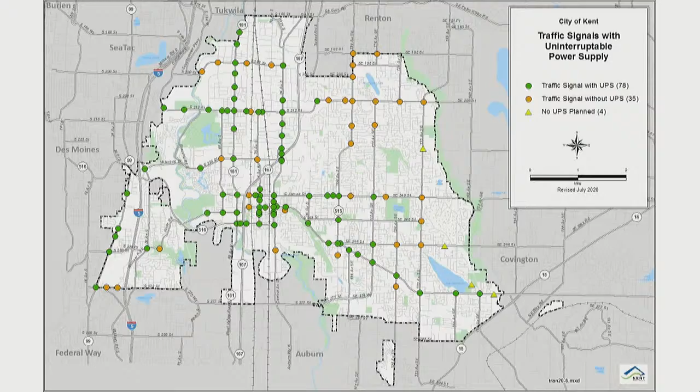Just a quick map showing the uninterruptible power supply locations, and the map's a little out of date. Apologize for that. There's actually 89. The additions have primarily been up in the Panther Lake area.

Traffic signal timing. From our perspective, we need to stay on top of the timing to keep the system efficient. Again, we have 117 traffic signals. They're on all of our major arterials. Keeping that timing adjusted for the fluctuating traffic conditions helps people move, reduces emissions, and generally keeps people happier. Our last major corridor retiming in the city was 2010.

However, we have partnered with King County Metro for some of their transit corridors. We've got a partnership where they will do the traffic modeling for us to change the signal timing at those corridors, and then our side of it is that we implement it and make those minor adjustments after it's implemented. Currently, we have 20 more signals that need to be connected to our central traffic control system, which is in Public Works across the street. And we estimate, again, to retime our major corridors is about $200,000. That is a project that's in the Transportation Master Plan.

Traffic signal communication. Our communication system consists of fiber optic communications as well as some of the old copper twisted wires. Our current network is about 132,000 feet long. To fully build it out and connect all of our systems together, we need about another 81,000 feet, which is somewhere in the $700,000 to $1 million range. When we get the system fully built out, though, it also allows us to expand our traffic camera locations and gives us the flexibility in the future to install more devices, like overhead reader boards or some kind of actuated message board. Having that communication system in place allows us to connect to that.

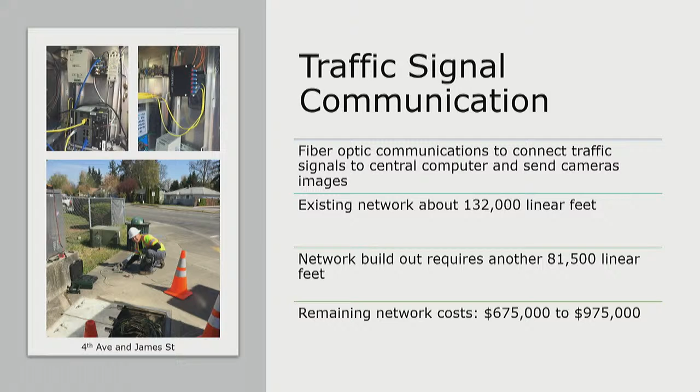Traffic cameras. We currently have 27 traffic monitoring cameras. At the bottom, we've got a list of some potential new locations. We have 4 cameras purchased for Canyon Drive, so we'll be installing those soon. Other locations we're considering: James Street going up the hill, 208th/212th Street going up that hill, Reith Road going up that hill. A lot of these we've been working with Bill Thomas to identify locations where we can install cameras that they can use for their weather response. So we're partnering on those things.

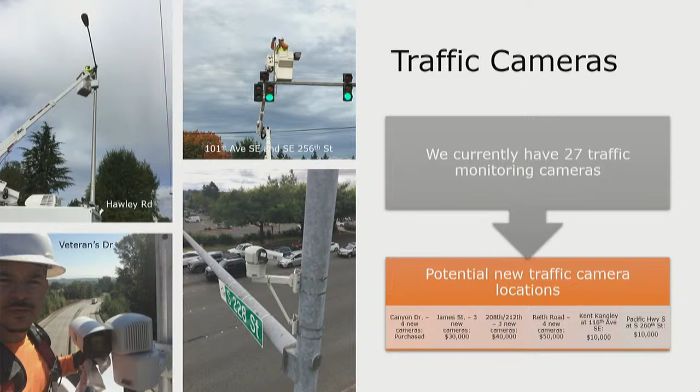Traffic loops. Traffic loops are critical to our signal operations. Our traffic signals operate on basically a responsive operation where it defaults green to one direction, and when a car comes from one of the side streets, we need to detect that car to change the traffic signal. So we default the signals to the heavier or primary traffic movement. And to detect those cars, we use these inductive loops. They're basically upside-down metal detectors in the pavement surface. When a car drives over, that sends the traffic controller a signal, which then triggers the traffic signal.

For 117 traffic signals, we have over 4,000 loops. We have a $50,000 annual budget and it costs about $2,500 per loop, so we're doing about 20 a year, but that doesn't include all the loops that get replaced as part of the overlay projects. Every time we pave through the intersection, those get ground out and replaced.

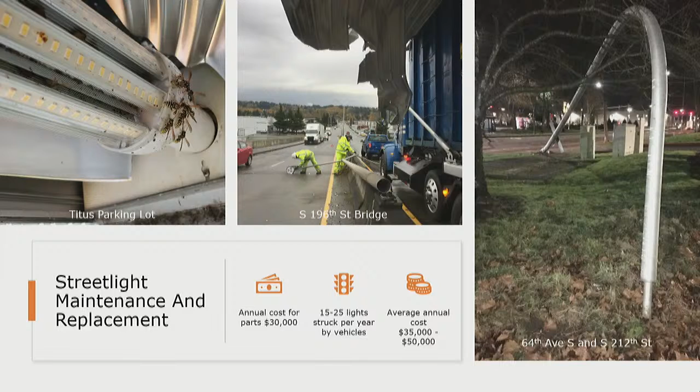Streetlight maintenance. Similar to our traffic signal controllers, we have an annual maintenance budget for streetlights. The city itself owns about 2,700 streetlights, and the remainder are owned by Puget Sound Energy that we pay them to operate and maintain. So we have about 15 to 25 streetlights that are struck per year. The last couple of years, it's hovered right around 19 or 20 streetlights that get knocked down every year. And then our average annual cost to replace or stand up those streetlights is between $35,000 and $50,000.

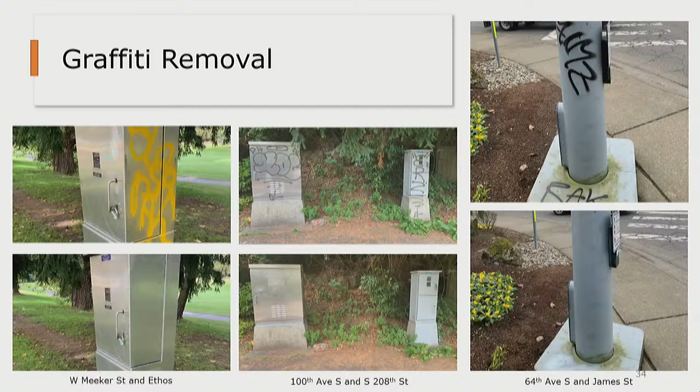Graffiti, you've probably heard enough about that. Our crew spent quite a bit of time removing graffiti. Luckily, our signal cabinets have a special coating and a cleaner, so it's reasonably easy to remove that. Streetlight poles, same thing, we're using Goof Off like most people. We do some tree trimming and brush cutting around our traffic signal system, streetlights and things like that to keep those accessible.

Additional streetlights, I believe you've probably all seen this slide before. The city's adopted streetlight policy calls for streetlights on all the arterial streets. Of 70 miles of arterials in Kent, we have about 27.5 miles of arterials that do not have streetlights. We're slowly making some inroads into these by having Puget Sound Energy install some streetlights, or developments. When a new development comes in on an arterial street, part of their frontage improvement is to put a streetlight or two in there.

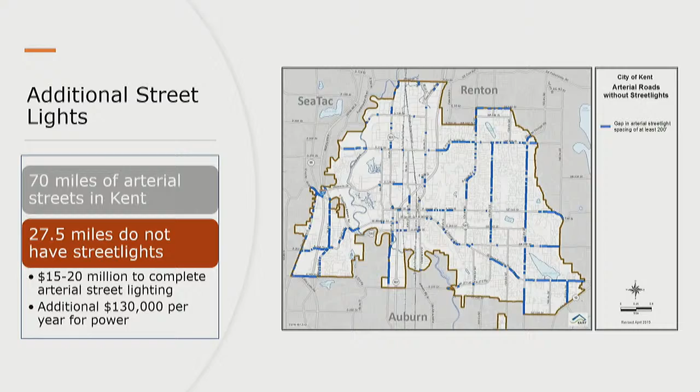So the current estimate is $15 to $20 million to complete the arterial streetlights, and when those additional streetlights would be added, that would be about an additional $130,000 a year for power, which is about 10% of what we pay now, about $1.3 million.

Copper wire theft, still an ongoing issue. In 2021, it cost the city $50,000 to replace the copper wire theft. Some of the things that we're doing to try and deter that, we are welding the junction box lids. That is somewhat effective, but with the ability for anybody to go to Home Depot and buy a battery-powered grinder to cut the lids off, it's not as much of a deterrent as it used to be. So now we've gone to replacing the copper wire, which has a high value, with aluminum wire, which has almost no value.

Like the out-of-the-box thinking. I do too.

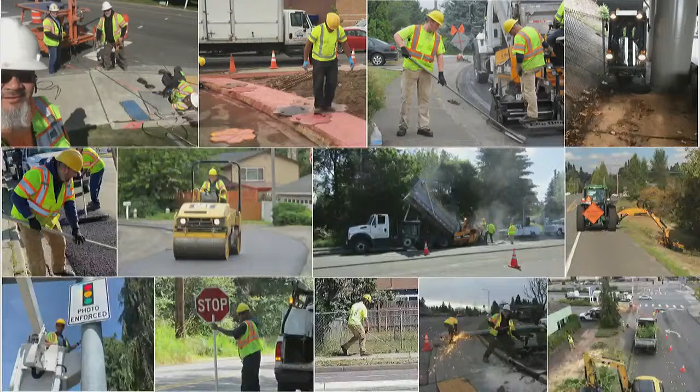And, whoops, with that. Are we done? We are done. Oh, okay. Didn't want to interrupt you.

Hey, great presentation, man. It's amazing how much work goes on in this city with our roads. I mean, $2 billion worth of asset, I think, of what I heard. That's incredible. And then all of the sustainability stuff they have to do. Kudos to the team. It's just a massive project. And like I said, the weather didn't make it any better this year. Probably create more opportunities for us. So, good job and kudos to the team.

This light's not working, so anybody have a comment? Madam Mayor, please. Thank you, Council President. Two things. So the 167 master plan, the lack of the ability to get funding for projects because we had no plan, just really proud of the amount of push that we had from our Public Works folks to get that plan going so that we could actually do projects. Yep. So grateful for that and excited to see where it ends up.

Then question on flashing yellow. Yes. So other than money, what is the criteria for where we put them? So flashing yellow arrows, there are only a couple of criteria. You need to have adequate sight distance. So if you've got a road with a left turn on a curve, sometimes those aren't the best places to put those because you can't see far enough to judge the oncoming traffic. And then the other one is primarily the number of lanes that are coming at you as you're trying to make your left turn. So 3 lanes is not a good place to put a flashing yellow arrow. I know Federal Way does it, but federal guidelines say we should only do flashing yellow arrows where you have to turn across 1 lane or 2 lanes, not 3.

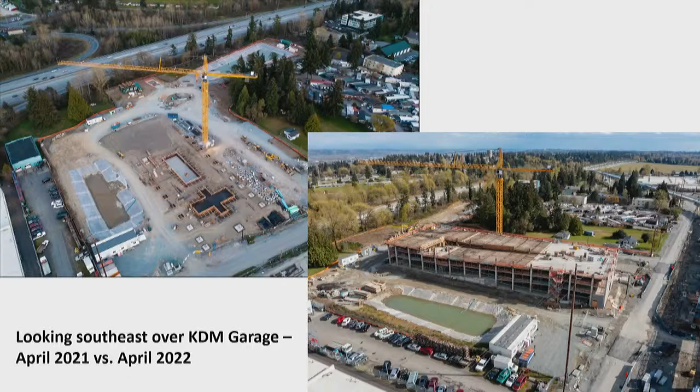A couple drone images there. The one on the left is looking, in general, southeast, maybe a little bit more east, but that's April 2021 on the left and April 2022 on the bottom right. So you can see the massive change there in the course of a year's worth of construction. So, yeah, again,